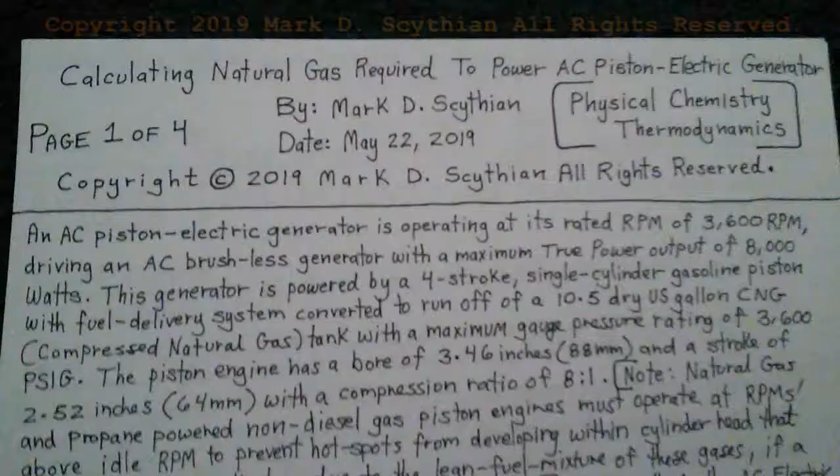Now, it's not a bad idea to run gasoline piston engines off natural gas because the fuel source is already in the vapor state. There are some drawbacks though, because the mixture is so lean, it is ideal for much higher RPMs, especially generators operating at constant speed, like about 3,600 RPM. And that's relevant to the gasoline four-stroke piston engines that you would usually run gasoline off of.

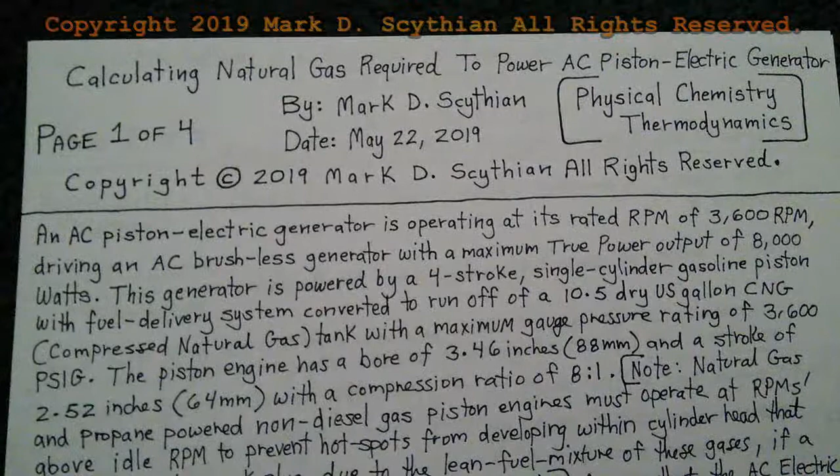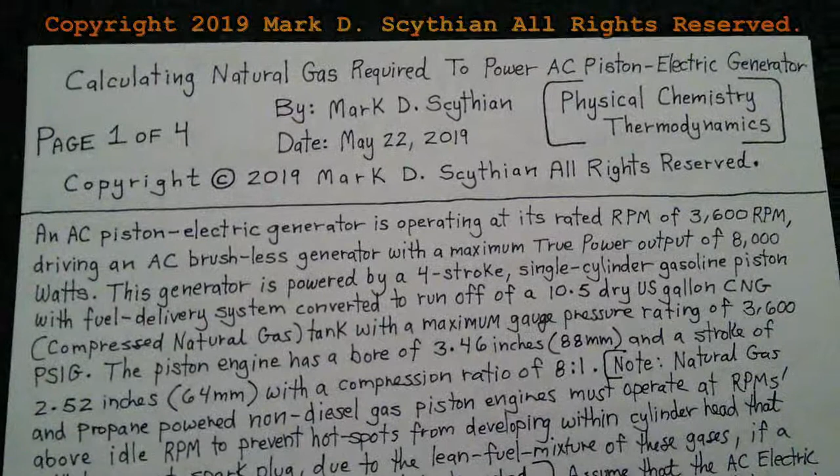Well, if you want to switch over to either propane or compressed natural gas, there are some calculations to make on the viability of doing so, if it's even worth doing so. So we're going to create an application here, taking the concepts of thermodynamics and physical chemistry, so we can know if this is even worth doing.

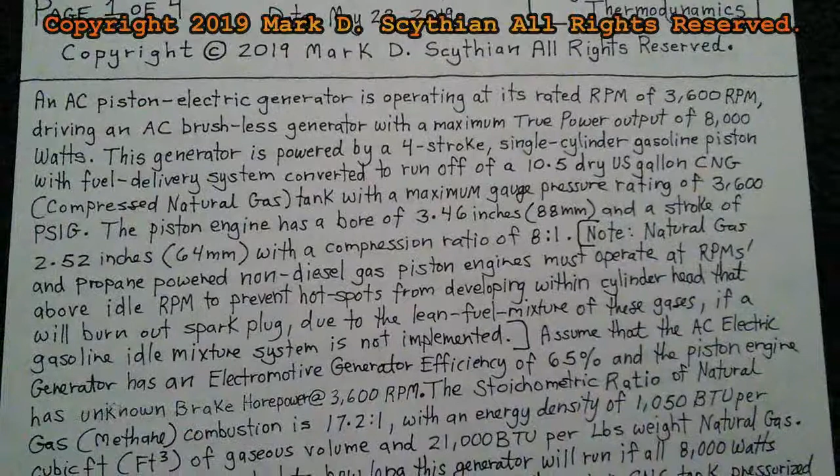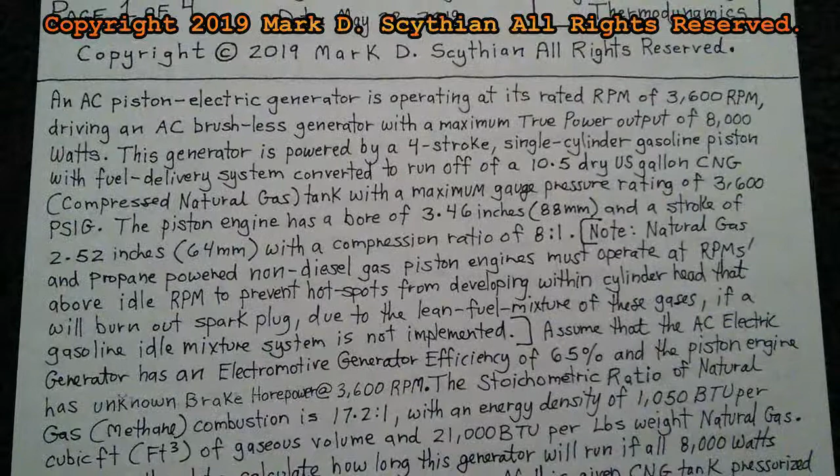So here's the scenario. An AC piston electric generator is operating at its rated RPM of 3,600 RPM, driving an AC brushless generator with a maximum true power output of 8,000 watts. This generator is powered by a four-stroke, single-cylinder gasoline piston engine with fuel delivery system converted to run off of a 10.5 dry US gallon compressed natural gas tank with a maximum gauge pressure rating of 3,600 psig. The piston engine has a bore of 3.46 inches and a stroke of 2.52 inches, compression ratio of 8:1.

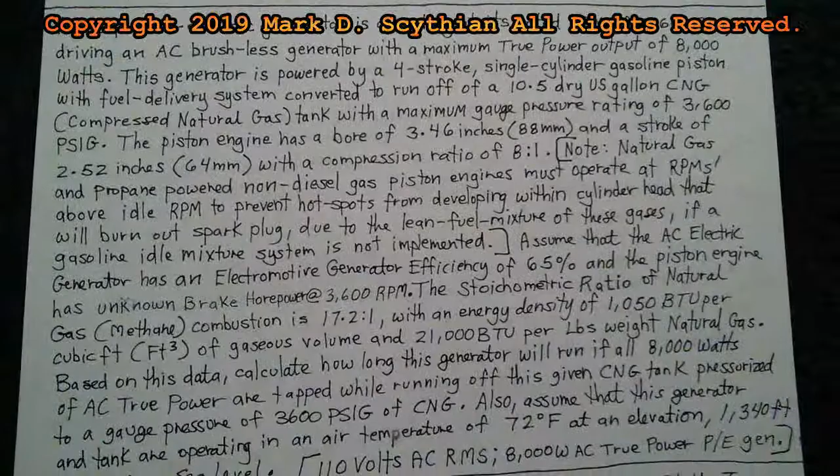Assume that the AC electric generator has an electromotive generator efficiency of 65%, and the piston engine has an unknown brake horsepower at 3,600 RPM. The stoichiometric ratio of natural gas, also known as methane, combustion is 17.2 to 1.

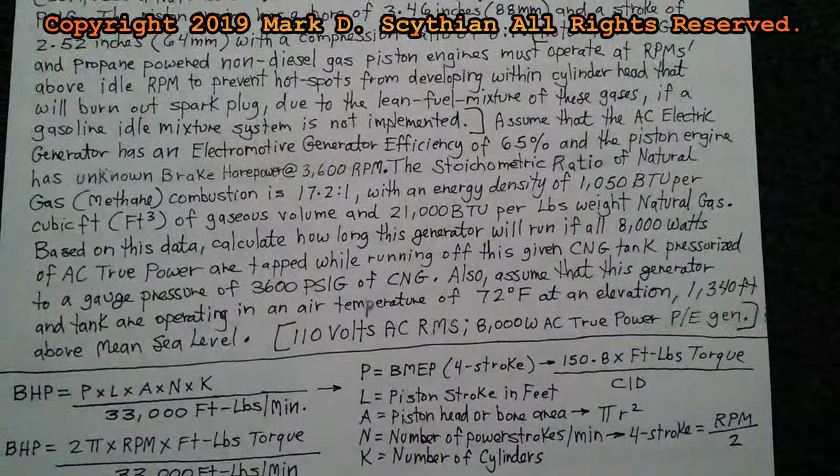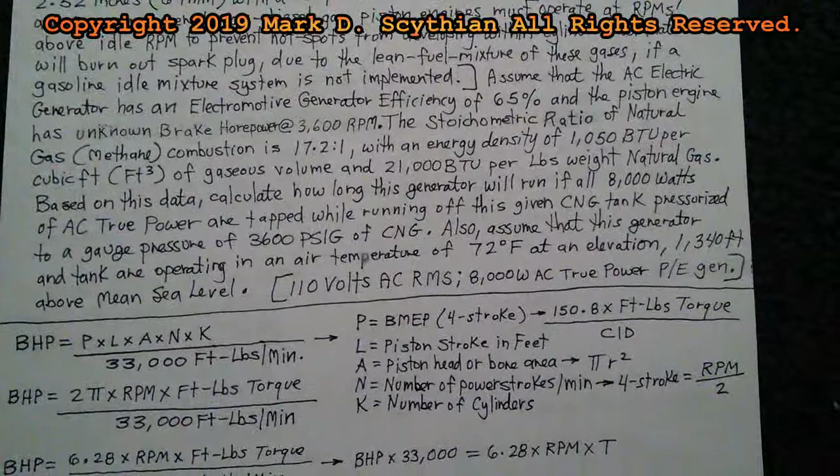Propane is actually 15.5 to 1, so it's even leaner, with an energy density of 1,050 BTU per cubic feet of gaseous volume natural gas, and 21,000 BTU per pound weight of natural gas. Based on this data, calculate how long this generator will run if all 8,000 watts of AC true power are tapped, while running off this given CNG tank pressurized to a gauge pressure of 3,600 psi.

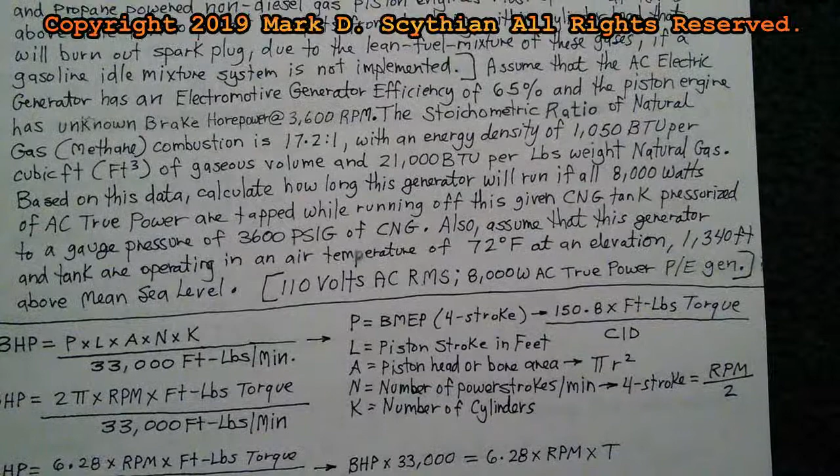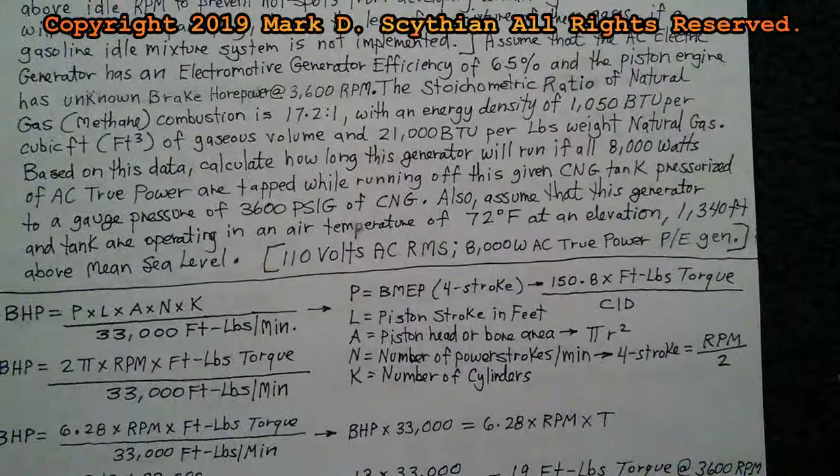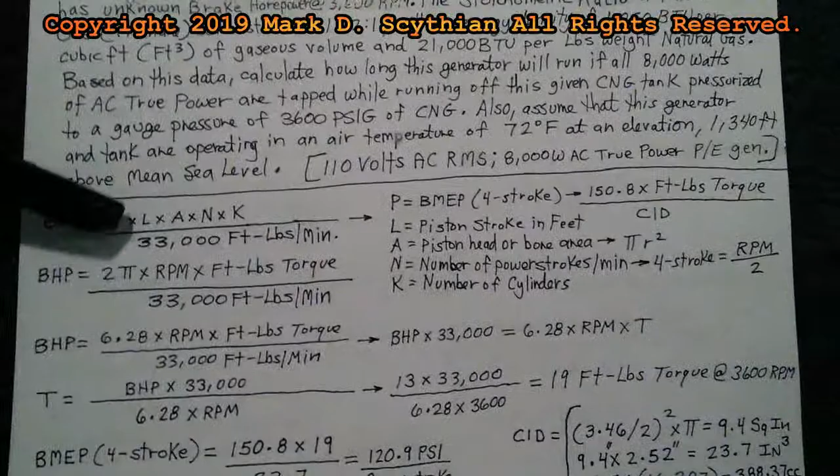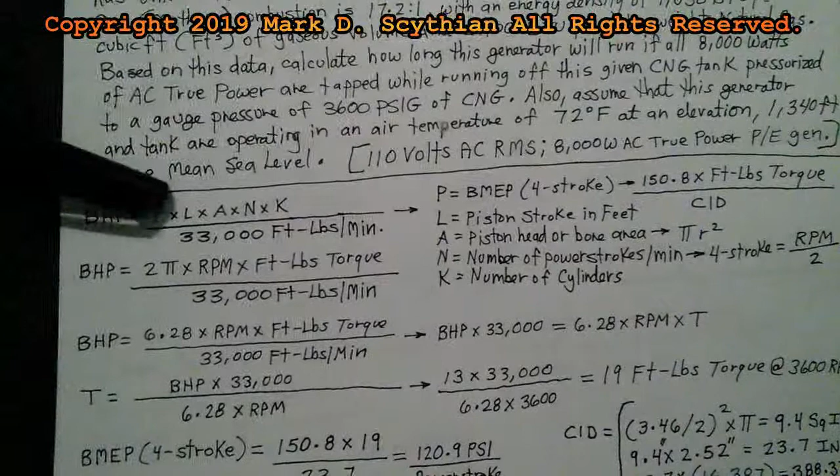So again, you can use the PLANK formula for calculating brake horsepower for reciprocating piston engines that are running off heat, or basically the pressure, so you can get that pressure from anything, even compressed air. But we're dealing with the pressure coming from fuel combustion.

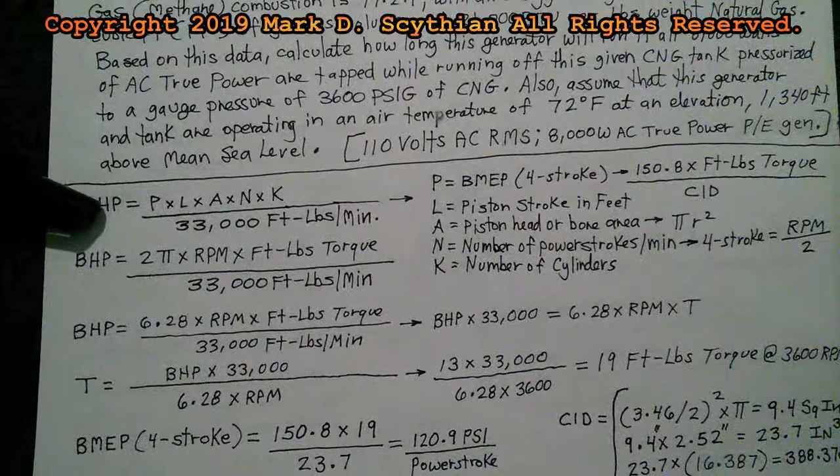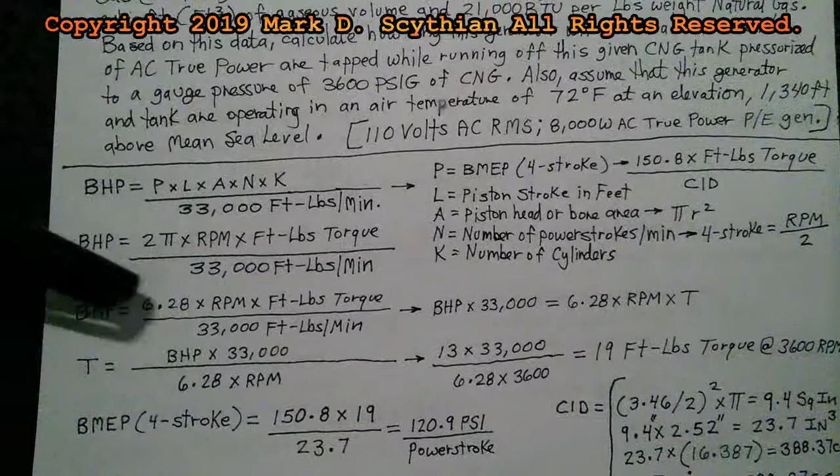So you're going to first want to solve for the torque. That's the most accurate BHP formula. The general one is this one right here: 6.28 radians times RPM times foot-pounds torque, divided by 33,000 foot-pounds per minute. So we can rewrite that and solve for the torque, the T component. So BHP times 33,000 is equal to this. So solve for T.

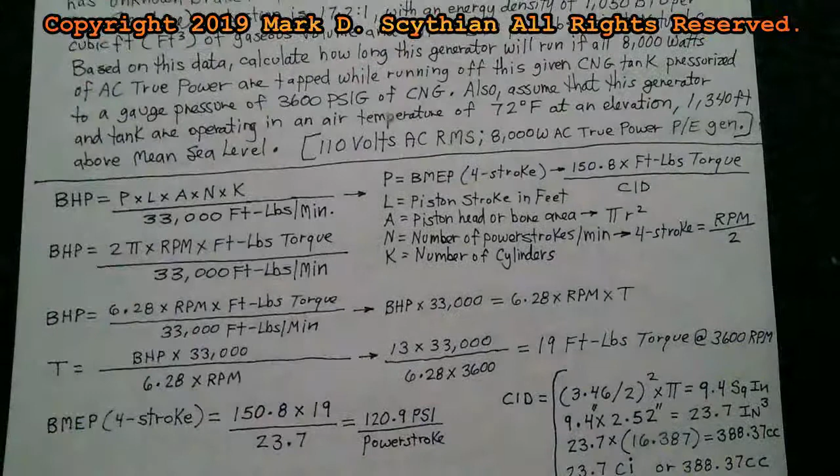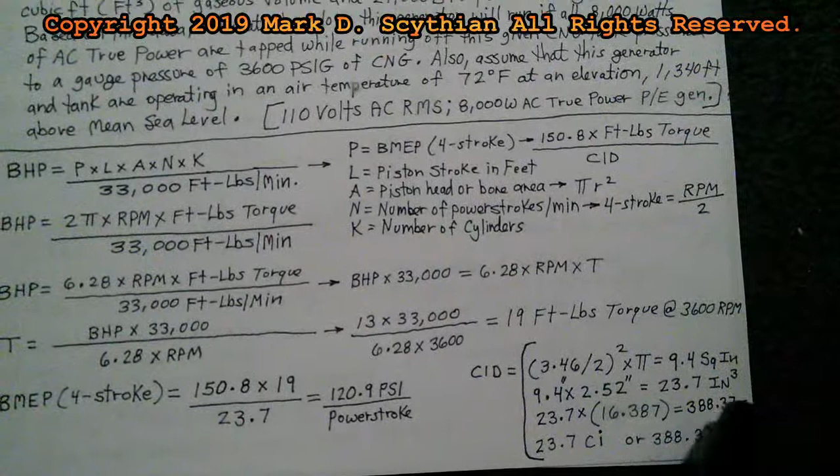So what we'll have to do is get the cubic inch displacement first. And of course that is a bore of 3.46 inches divided by 2 to get radius squared times pi. So we have a 9.4 square inch bore, times a stroke of 2.52 inches. So there's 23.7 cubic inches per cylinder, or 388.37 cc displacement.

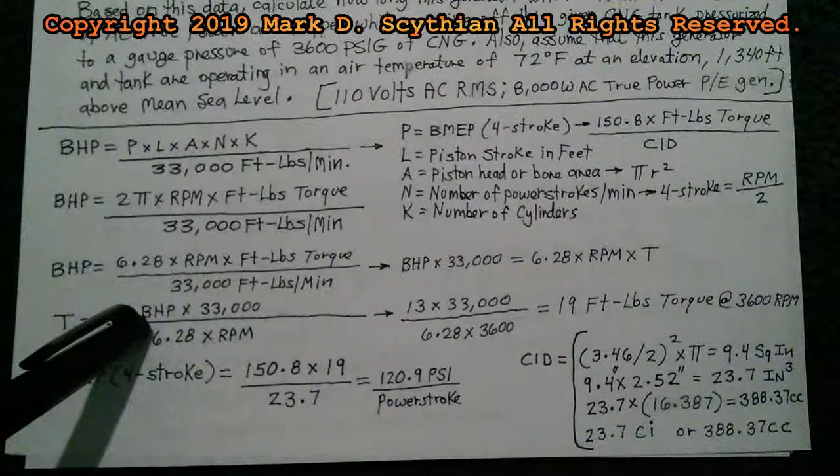So all we have to do is calculate the brake horsepower. Actually, this one here, I'm going to bypass this, it was more of a note. But we'll go to page 2.

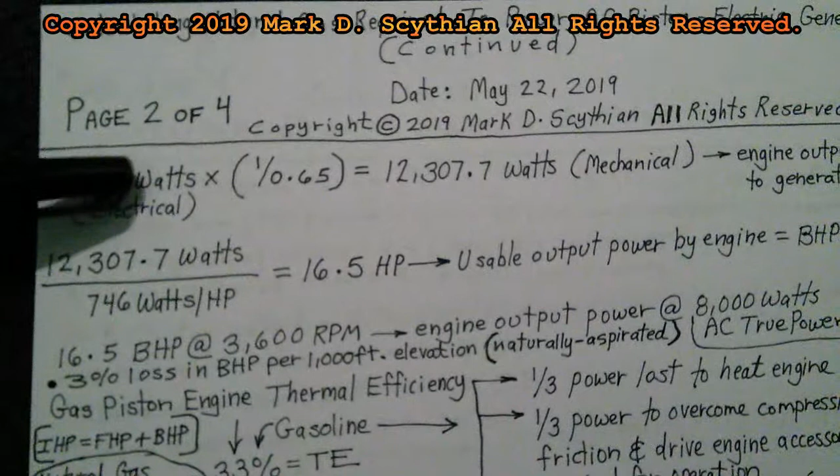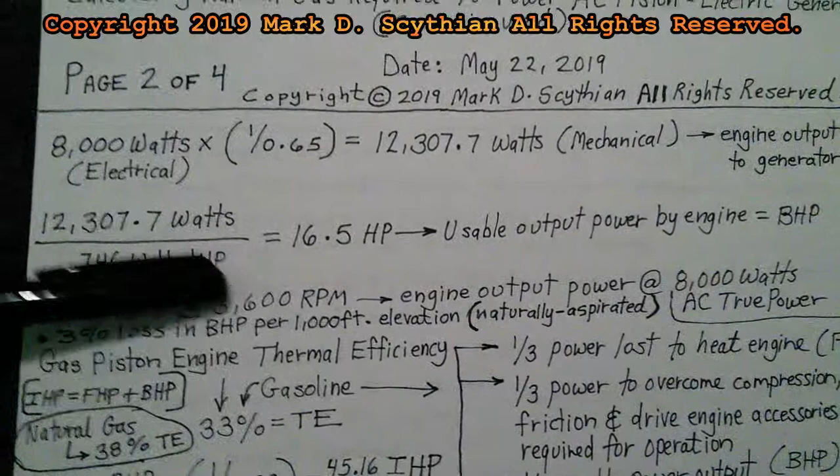And remember, the output is 8,000 watts. That's what you're actually getting if all the load is tapped electrically, 8,000 watts AC true power. We have a generator efficiency of 65%, so 1 over 0.65. It's going to take 12,307 or 308 watts of mechanical power output from the piston engine to get this electrical output. So we find out what that is in horsepower, divide it by 746. We're going to need 16.5 horsepower, actually brake horsepower output.

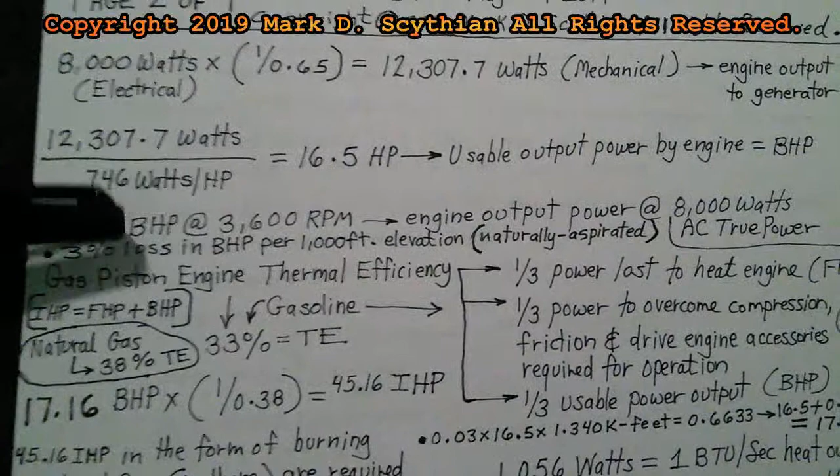And remember that for every 1,000 feet above mean sea level, you're going to lose 3% in brake horsepower, if it's a naturally aspirated piston engine, especially like a small engine, nothing modern like switching valves like you see on cars. But typically you would keep the air pressure at sea level conditions with altitude using a turbocharger running off the exhaust, but this is naturally aspirated.

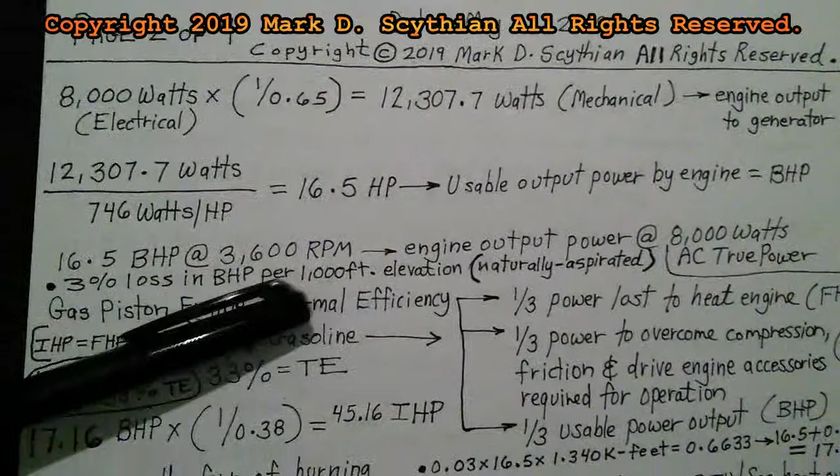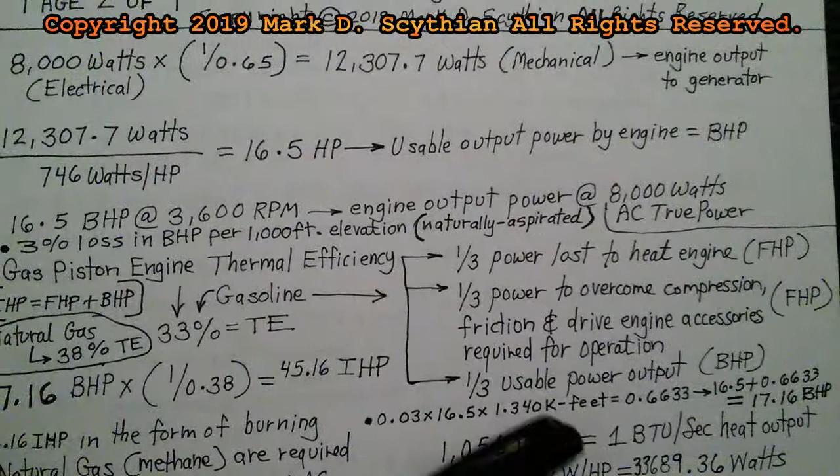So it's implying you're going to lose 3% brake horsepower per 1,000 feet elevation. We're at 1.34 K feet, 1,340 feet above mean sea level, times 0.03 times 16.5. So we're going to need an additional 0.66 horsepower to compensate.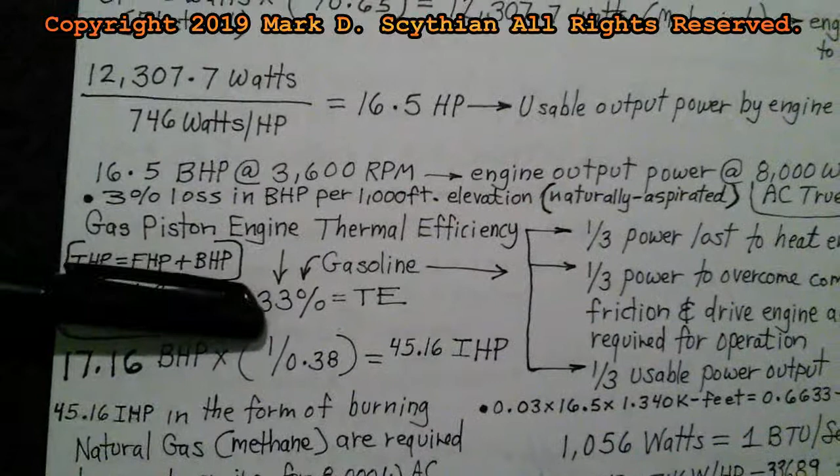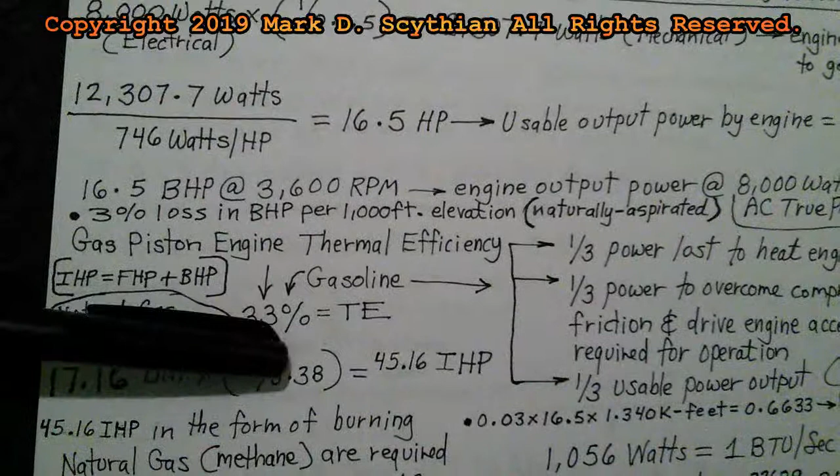So it's been written as 17.16 brake horsepower. And then if you do the analysis on natural gas combustion, it's a little bit better thermal efficiency than gasoline, about 38% thermally efficient inside a piston engine. So 1 over 0.38, you get 45. You're actually going to need 45.16 horsepower in the form of burning natural gas.

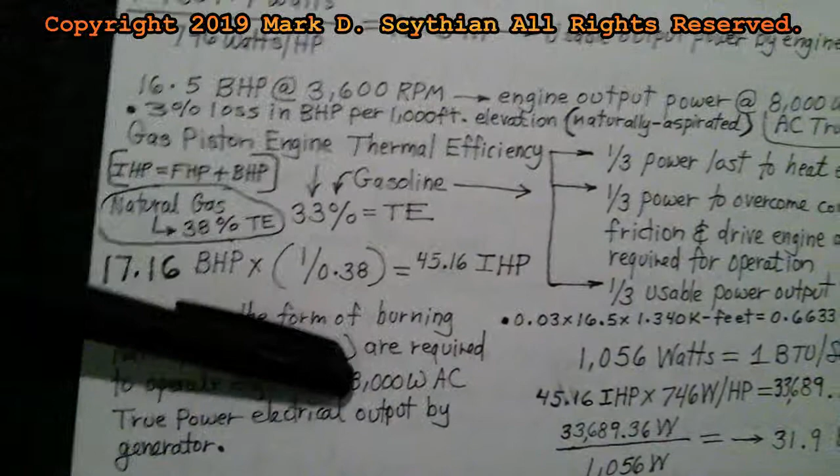Methane is actually required to operate engine output to get the 12,307.7 in order to get the 8,000 watts AC electrical power.

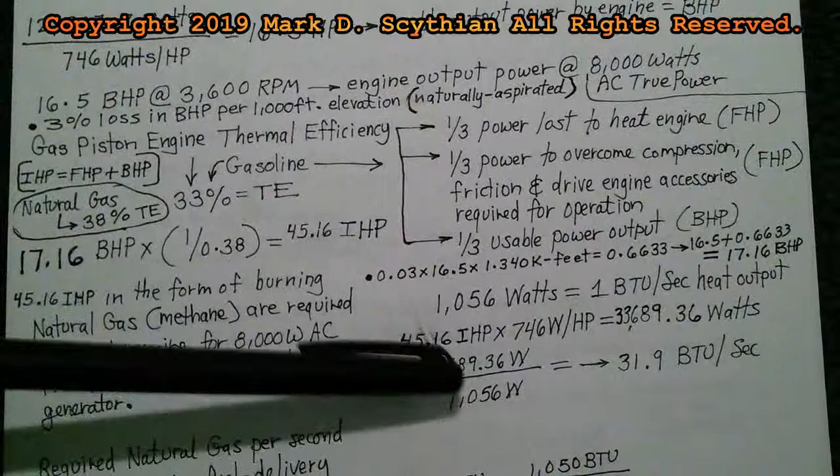So we do know that for every 1 BTU per second heat output, that's the same as 1,056 watts. So all we need to do is take the 45.16 times 746 watts per horsepower, get the watts out of that, and then divide that into 1056. So that's 31.9 BTU per second.

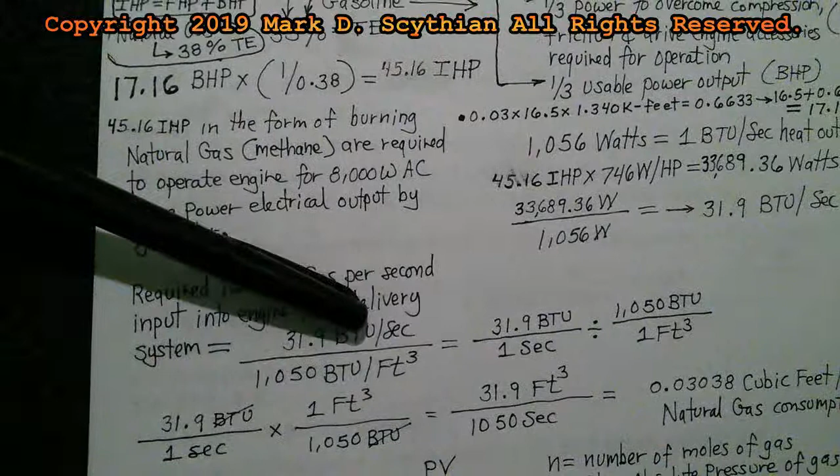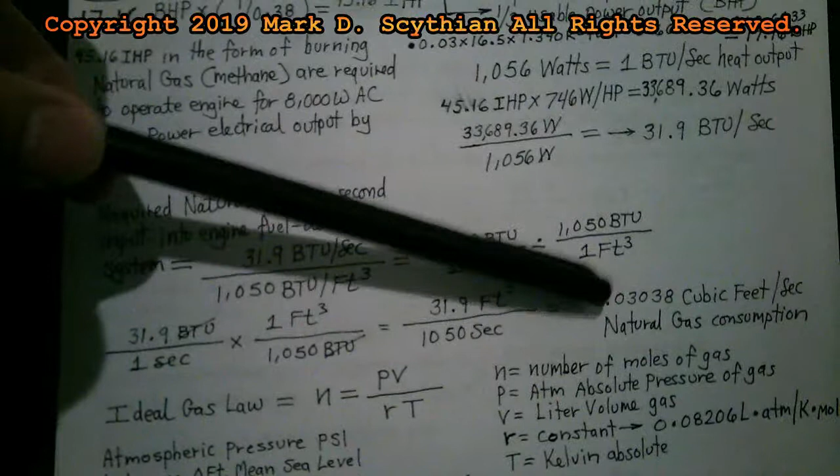Required natural gas per second input into engine is 31.9 BTU per second. We divide that into 1050 BTUs per cubic foot of natural gas. Translates to, if you set it up right, these cancel out, and it's about 0.03 cubic feet per second natural gas consumption. Then you have to go to the ideal gas law.

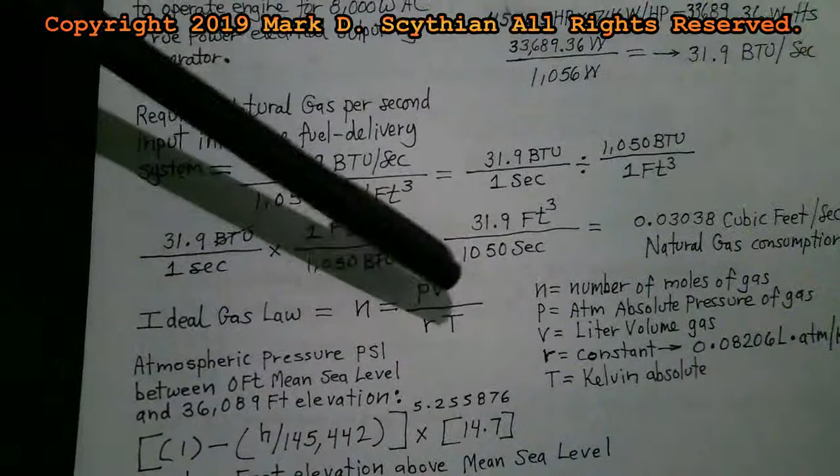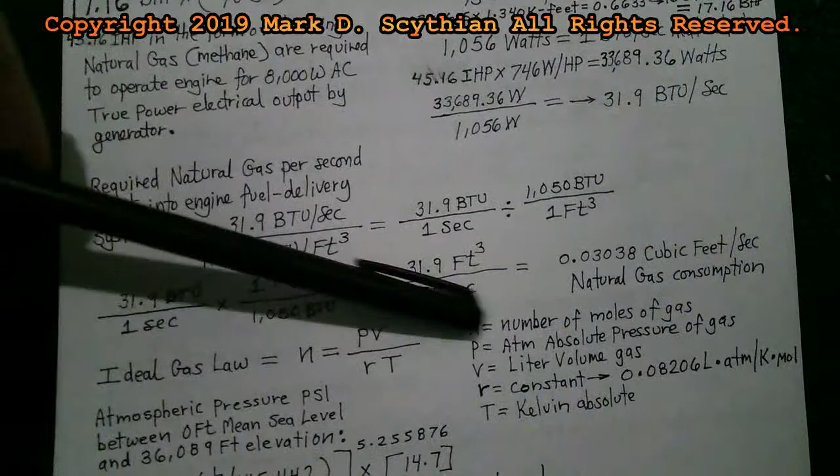Number of moles is equal to absolute pressure of the gas, fixed volume in liters, divided into that's absolute pressure in ATMs times a fixed volume in liters, divided into this constant here, 0.08206, times the Kelvin temperature, which is the Celsius plus 273.

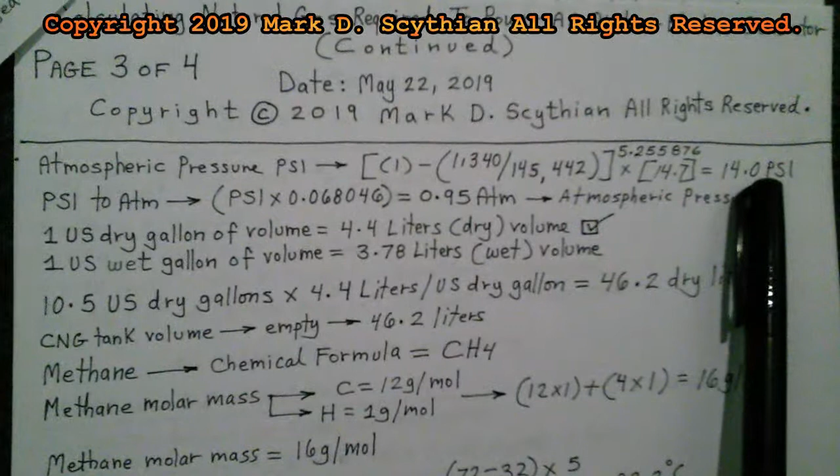So all we have to do is calculate the atmospheric pressure here. You can use that equation again. This gets you the ATMs here, times 14.7. So if we go continue on here, we have 14 psi at 1,340 feet above sea level.

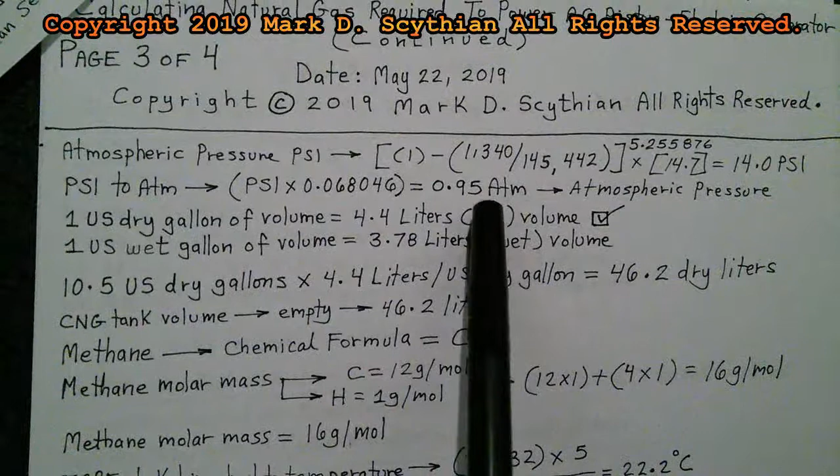So that's the same as 0.95 ATM. So all you got to do is just take the PSI, multiply it times this factor, and that would be the same as this value here, excluding the 14.7. You'd get the same thing here. That's a metric version, that's the US English version, but it works. Both of them are the same for this calculation.

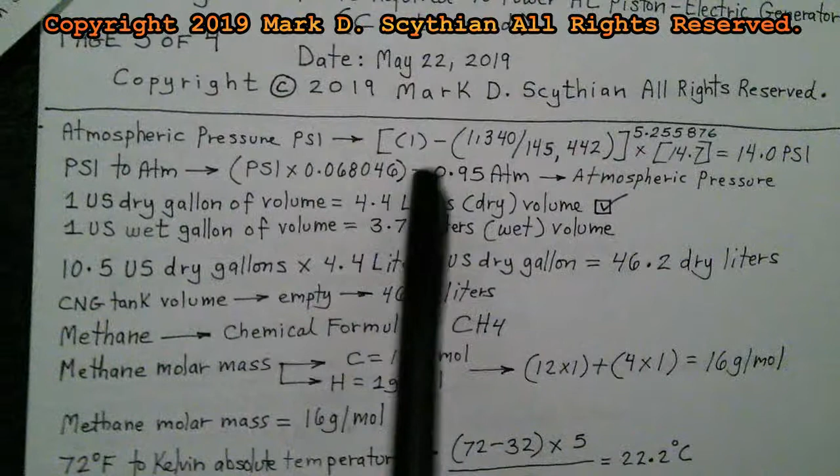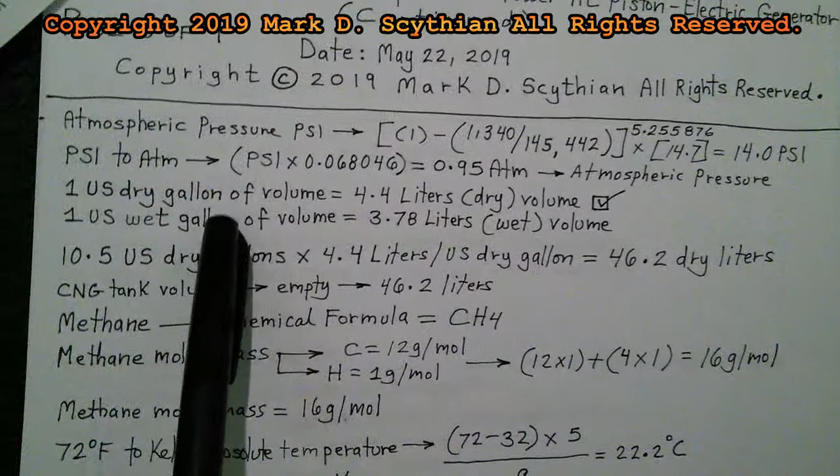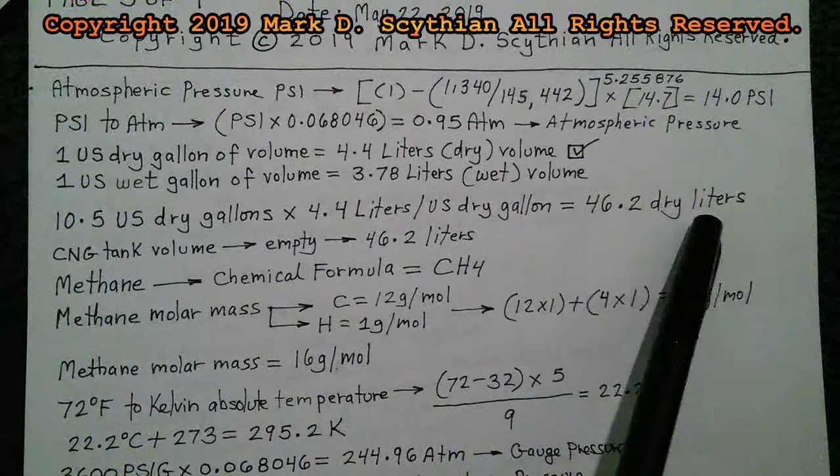So 1 US dry gallon of volume is 4.4 liters, but a wet gallon, like liquid, it would be 3.78. So you got a little bit more volume involved with the conversion of a dry gallon or a gas gallon volume. So gallon is a volume measurement, right? So 10.5 US dry gallons times 4.4. So that's a 46.2 dry liter tank, or say 46.2 liter tank.

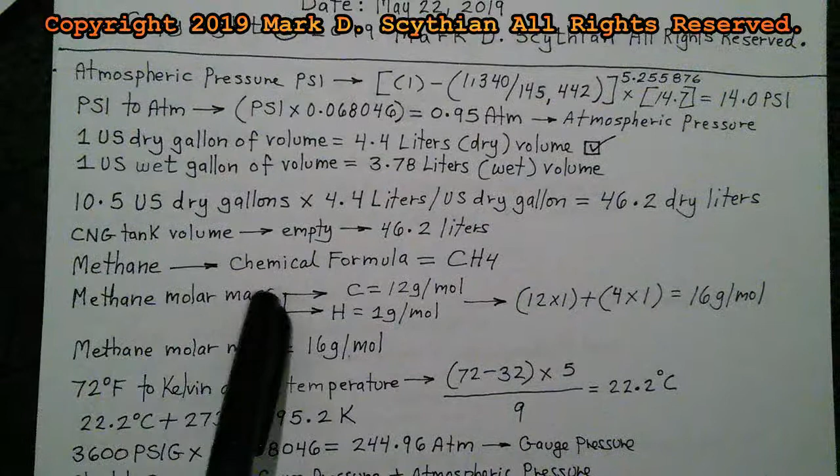CNG, compressed natural gas volume, empty, that's 46.2 liters. Methane has a chemical formula, CH4. So you have 12 grams per mole for carbon, 1 gram per mole for hydrogen. You add it up, your 16 grams per mole is the molar mass of methane or natural gas.

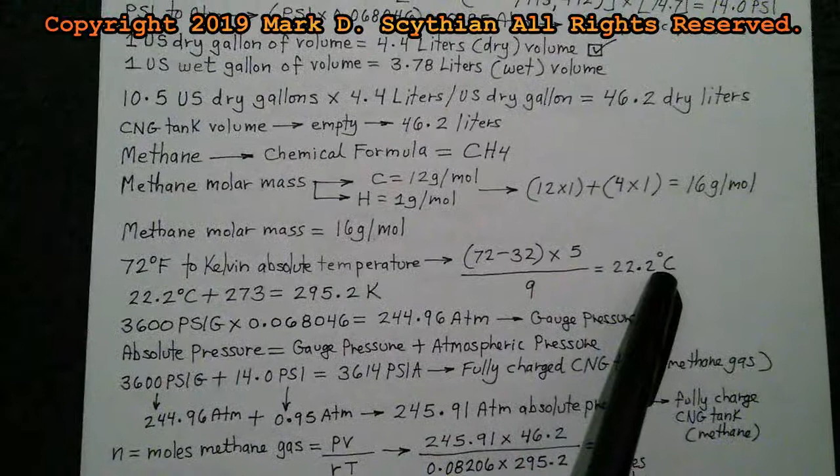We got to convert 72 degrees Fahrenheit to Kelvin absolute temperature. So subtract 32, multiply times 5, divide by 9, 22.2 degrees Celsius is 72 degrees Fahrenheit. Add 273, so we get 295.2 Kelvin.

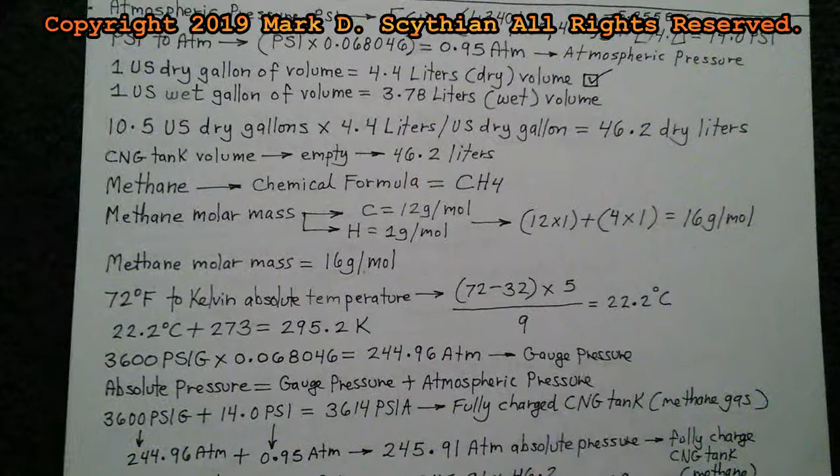And then what you do is you take the gauge pressure. We know it's going to be 3,600 psig times the conversion factor here. And so we need about 245 ATMs of methane gauge pressure, 245 times greater than standard atmospheric pressure in compressed natural gas.

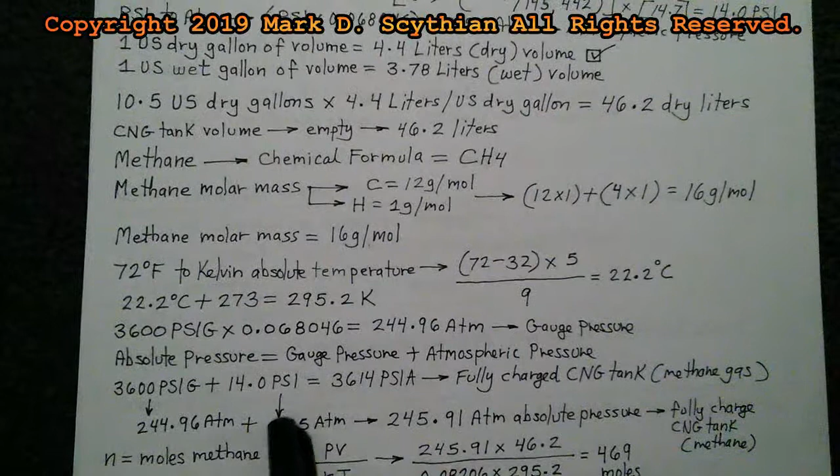Then, of course, absolute pressure is the gauge pressure plus the atmospheric pressure. So we convert the 3,600 psig, 245 ATMs, 14 psi, 0.95 ATMs, add them up. We have a total absolute pressure, 245, about 246, let's say 245.9 ATMs absolute pressure, fully charged CNG methane tank, right?

And then now you're able to calculate the moles. We use the N mole, we can use N right here. So just put 245.91 for absolute pressure times a fixed volume 46.2 liters, divided into the constant times the Kelvin absolute temperature. That's 469 moles of methane gas.

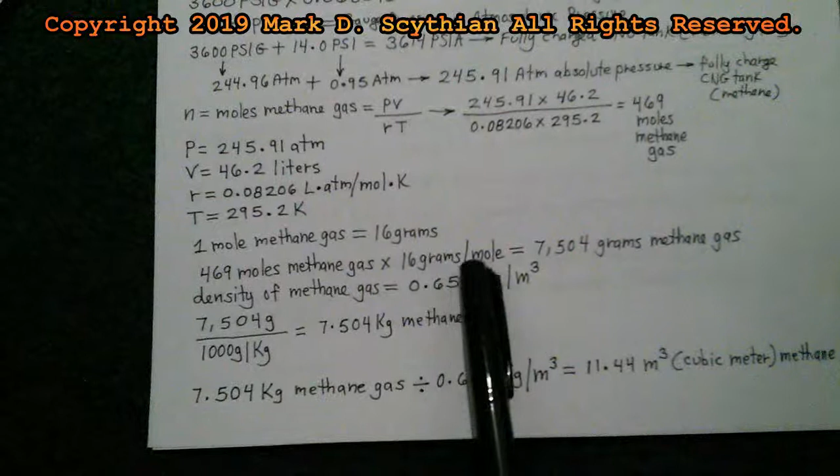So then we know that 1 mole of methane gas is 16 grams. So if you just figure that out, 469 moles times 16 grams per mole for natural gas, that's 7,504 grams of methane gas. Divide that by 1,000, so it's 7.5 kilograms methane gas.

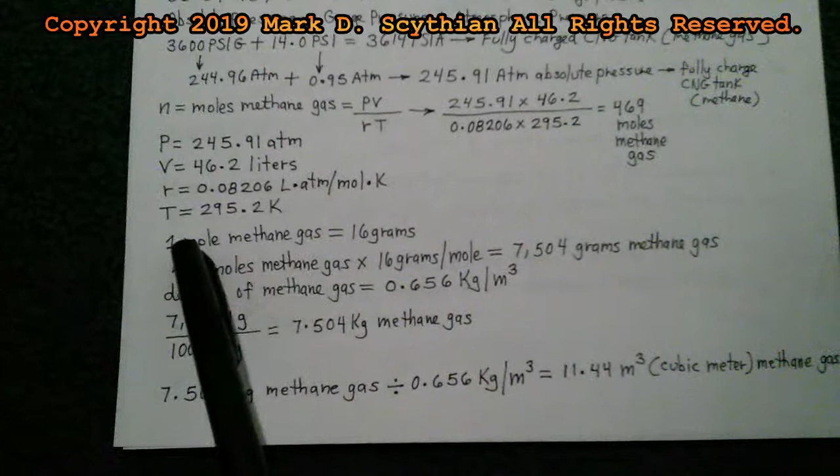So if we divide now, if you go look up the density of natural gas, which should be on any chart, you're going to get 0.656 kilograms per cubic meter is the density of natural gas or methane. So take this weight or this mass of the gas charge, divide it into the density. So that's 11.44 cubic meters of methane gas has to be pressurized into that tank.

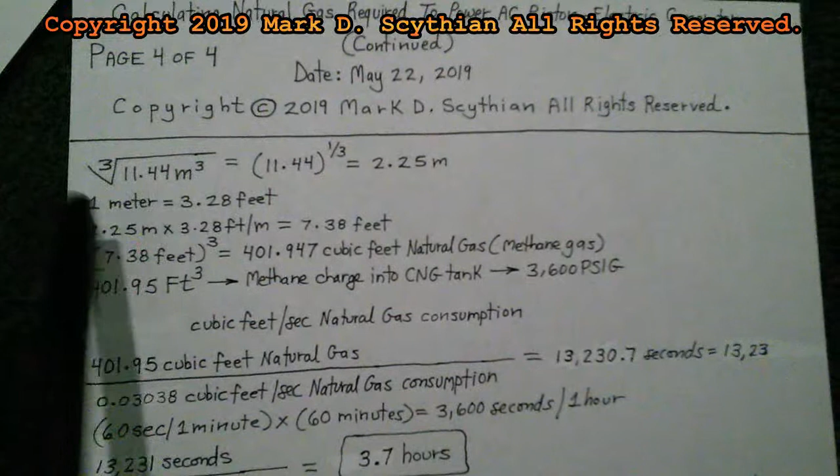So you just get the cube root of 11.44 cubic meters, 2.25 meters. 1 meter is 3.28 feet. So just take 2.25 meters, multiply it by 3.28 feet per meter, 7.38 feet, then cube that. So that's about 402 cubic feet of natural gas.

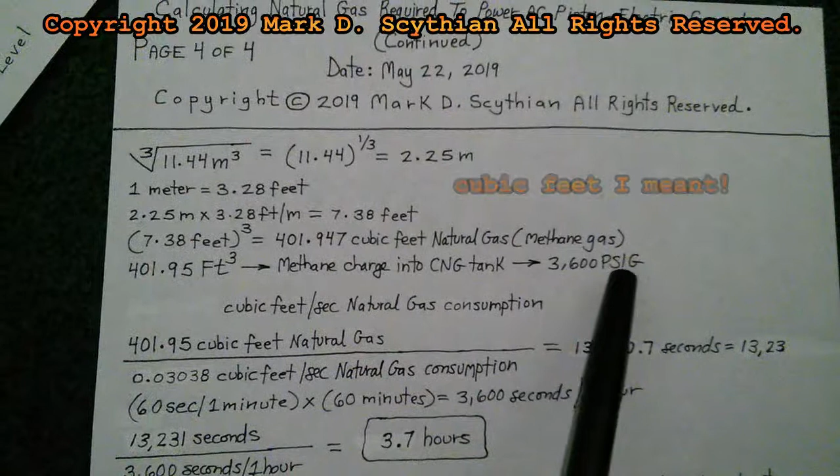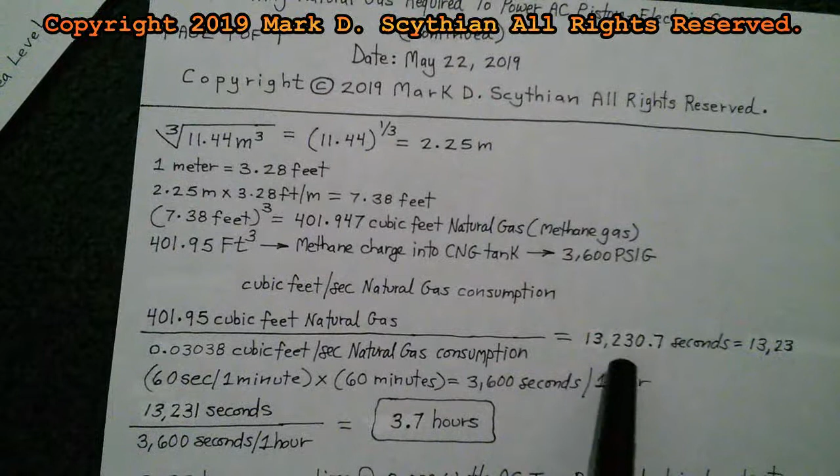So I just put 401.95 cubic feet methane charged into tank equals 3,600 psig. And if we take the 401.95 cubic feet natural gas and divide it into the rate that gas is going in to get that 17.16 brake horsepower, that translates to about 13,231 seconds. So we divide that into 3,600 seconds, which is 1 hour.

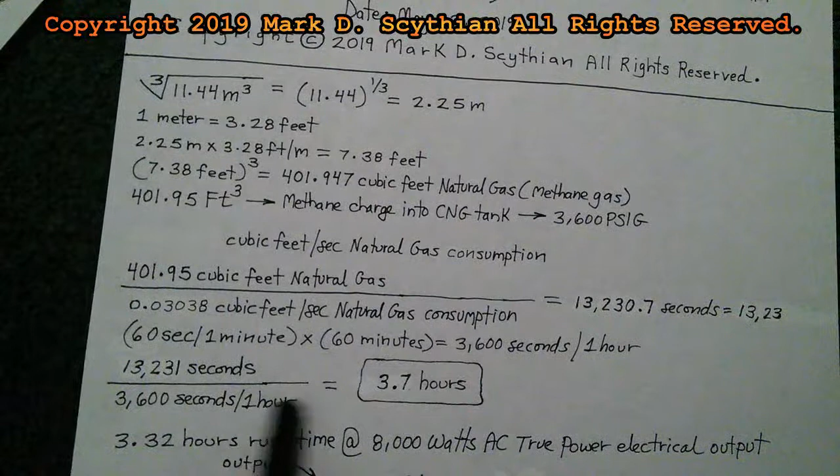So you only get about 3.7 hours of runtime. However, that's at full 8,000 watts. And a lot of generators are tapped maybe half, 3/4. But let's say it's an emergency and all the power is being tapped, and maybe the gas stations are shut down, and like gasoline and all that.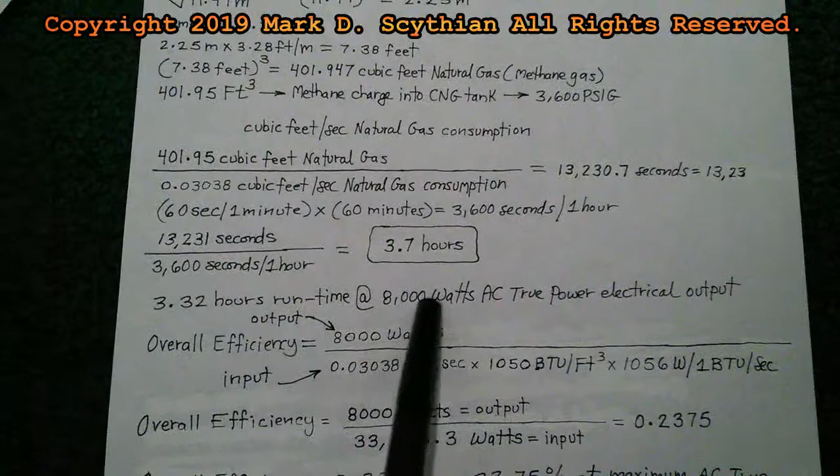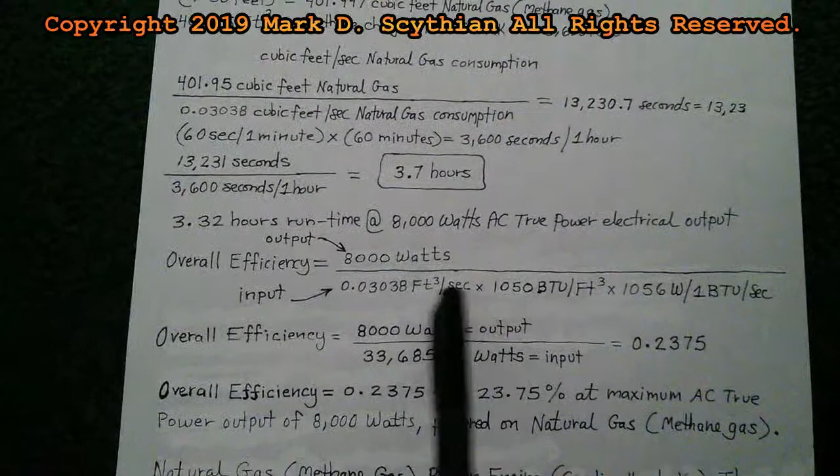Well, at least with 3,600 psi G charge into a 10.5 gallon tank, you should get close to 4 hours, say 3.75 hours of runtime. So approximately, say 3.5 hours, just to be safe.

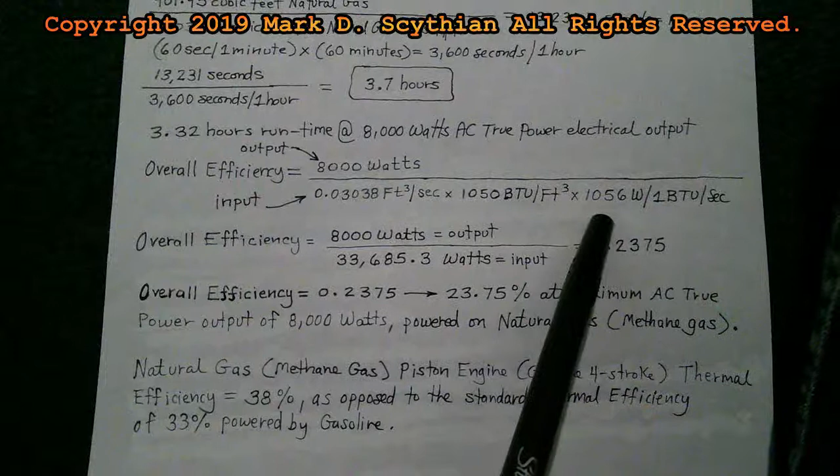So if you want to look at the overall efficiency involved, it's 8,000 watts output, that's what you're getting, that's what you want, that's why you have that generator. But the input is going to be this rate of gas flow, 0.03 cubic feet per second, times 1050 BTU per cubic foot, times 1056 watts per BTU per second. So that translates into this ratio.

You got to put 33,685 watts input in natural gas to get your 8,000 watts output. So it's about 23%, which is about right.

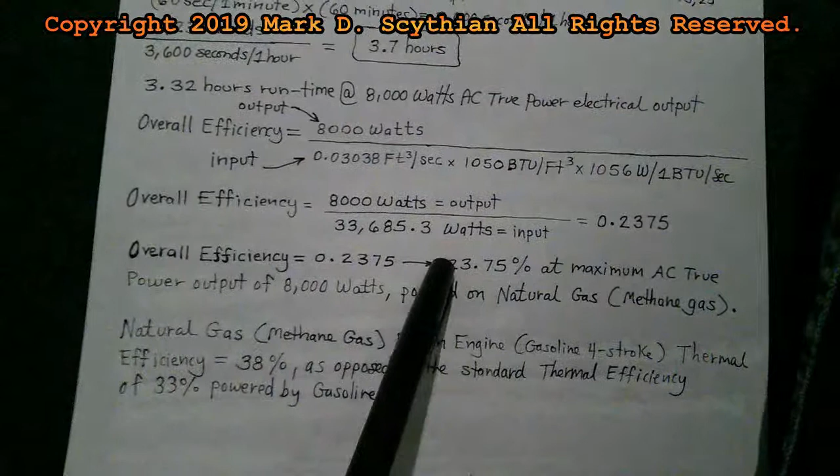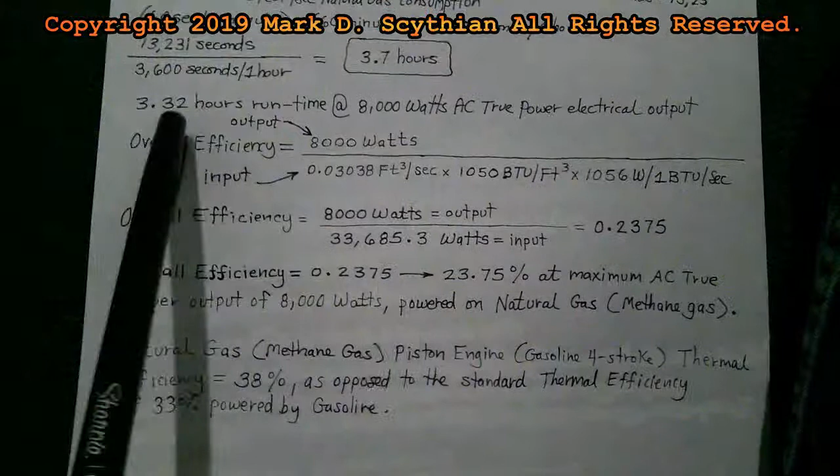Fully running on gasoline, you're probably looking about 18%, 19%. Because remember, no load thermal efficiency with gasoline is 33%. That's just to keep the engine running. And then whatever you do with that engine, you're going to go down more.

So typically, if you have a generator maxed out, gasoline, 4-stroke, and you have all 8,000 running full with maybe a voltage regulator so it doesn't burn up, it just limits to 8,000. You might get about 16 to 18%. So this is a little bit more efficient.

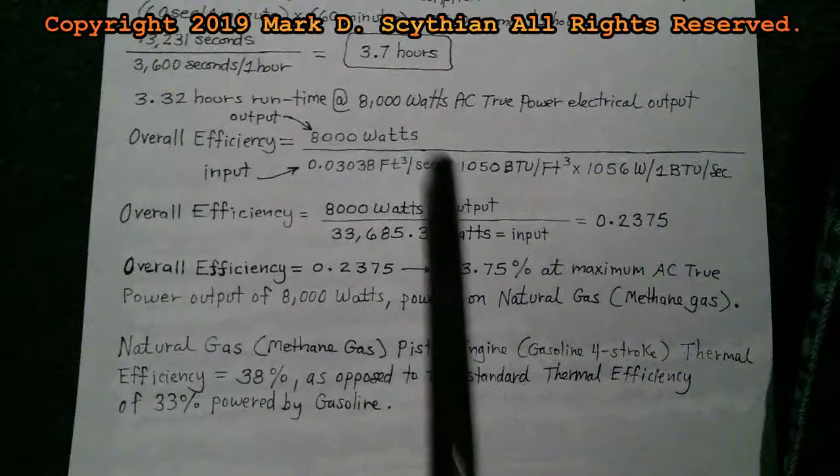It is very conservative on the thermal efficiency. There's a lot of calculations where the burn rates are 50% thermally efficient, in open air and maybe heating. But when it comes into reciprocating engines, you'll get about 5% more efficiency, about 38%, just to run the engine. And then to have that engine run at the generator, then it's going to cost a lot more. So about 23 to 24%, which is quite high given the condition.

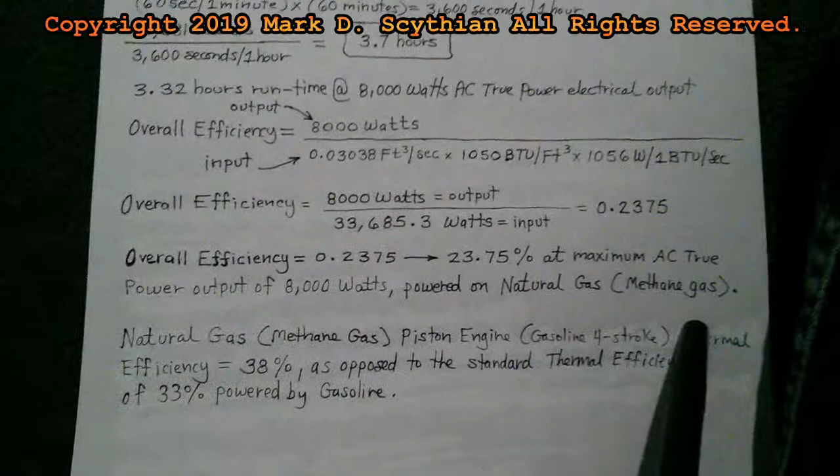But then look at the runtime, it's not that long. So you're going to have a cleaner engine, less carbon into the oil, you can go longer before oil change. A lot of times the oil just burns out and you have a float in there, shuts the generator off, it's the oil guard.

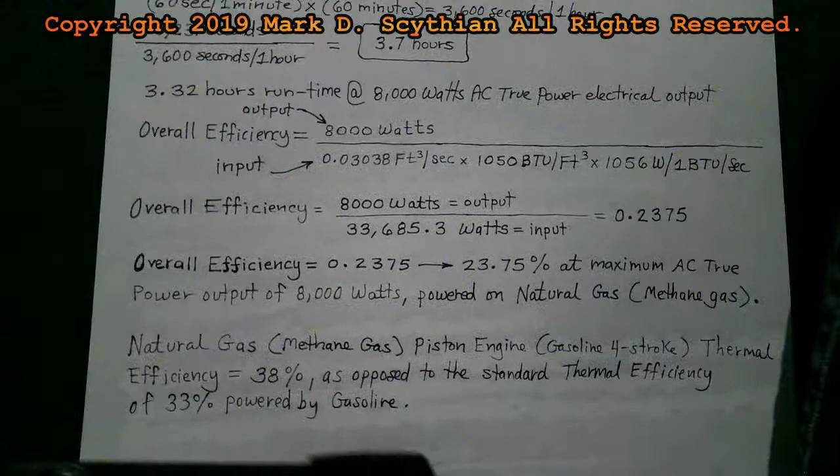But I'm just saying, if you got the oil under control, or you built something like an oil cooler for continuous long extended operations where you could move the oil around, an external oil cooling system, like 4 times the oil or something, just to maximize the oil runtime.

Let's say you did do something like that, like a modification, and you could run it for like 1,000 hours. Well, the oil would be relatively clean by a factor of about 2. It would be 3,000 miles in a car run on natural gas. It would be 6,000 on the oil change. So you just have a cleaner engine.

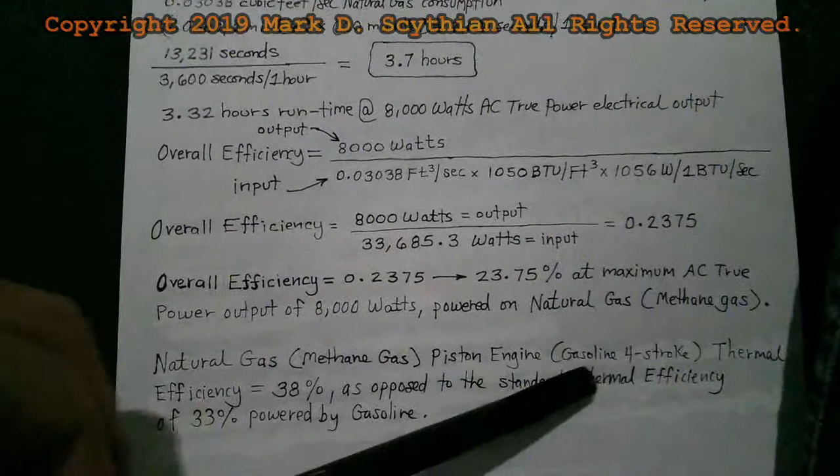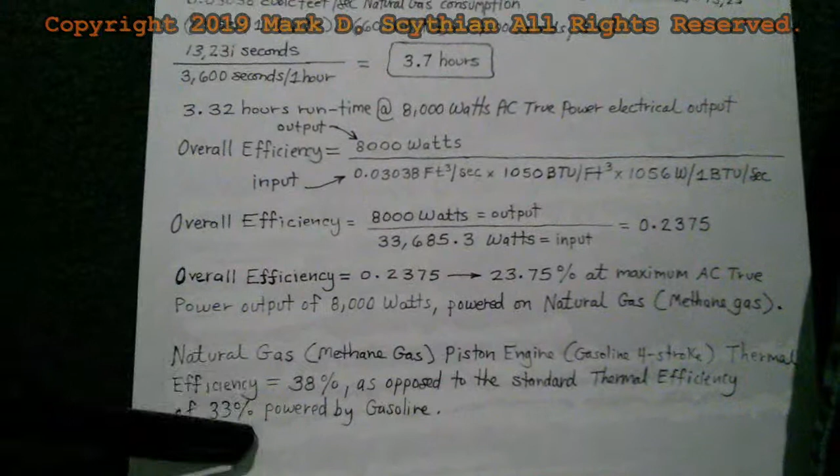But then the drawback is you don't get much runtime. And maybe for emergencies, short time, it'll work. But overall, it's just better to stick with gasoline if you can store up on that during an emergency, just enough. And I can do another analysis on the gasoline version to see the comparison.

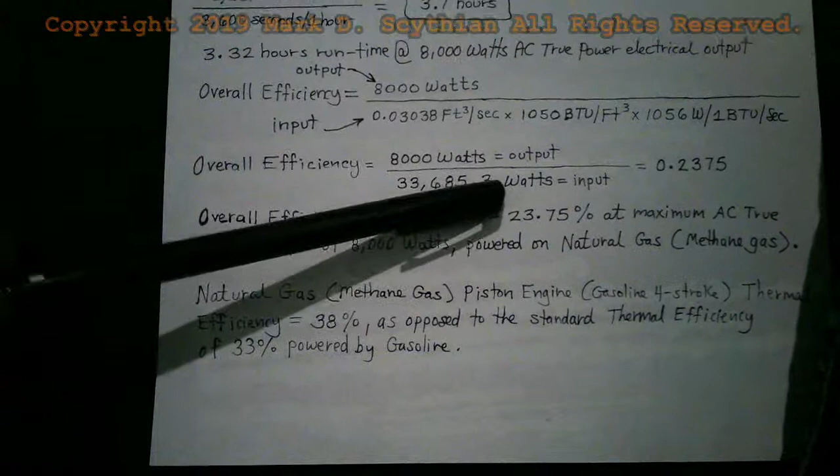But anyway, it's a natural gas methane piston engine, gasoline 4-stroke, thermal efficiency is 38%, as opposed to the standard thermal efficiency of 33% powered by gasoline. And then after you tap all 8,000 watts, that's pretty high actually, about 24% overall efficiency.